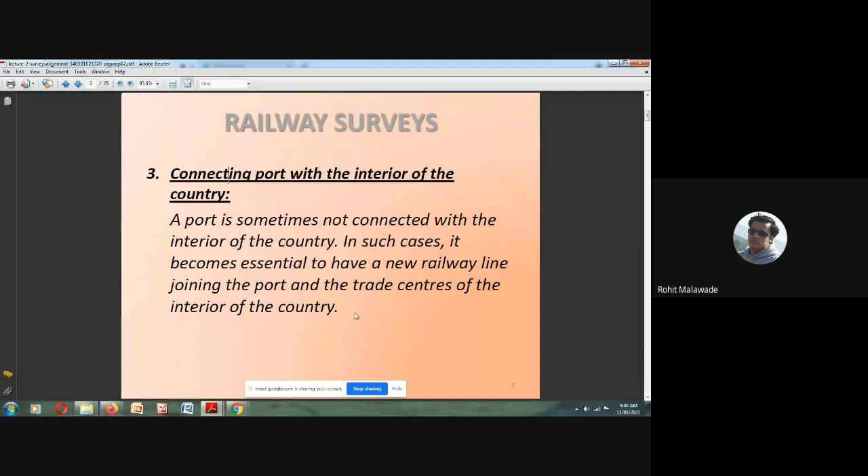Next is shortening of the existing route. Suppose you are having an existing route, and this distance is large. If I want to connect two points, point A and point B, instead of traveling along this existing road, I will be making a new route.

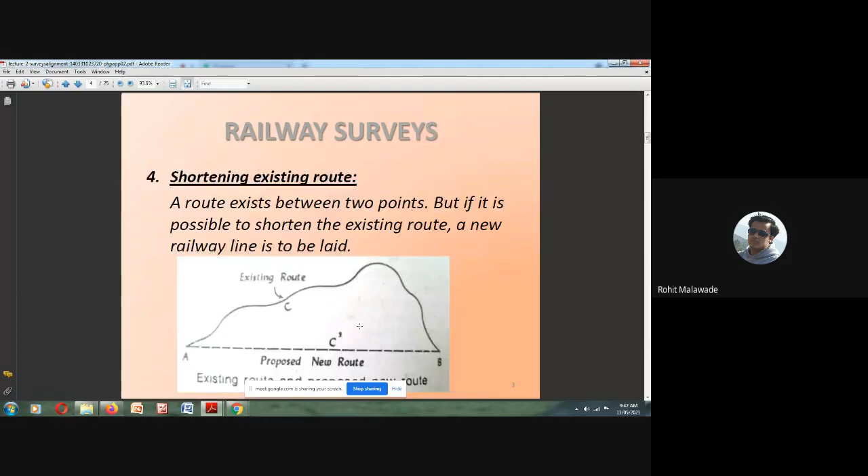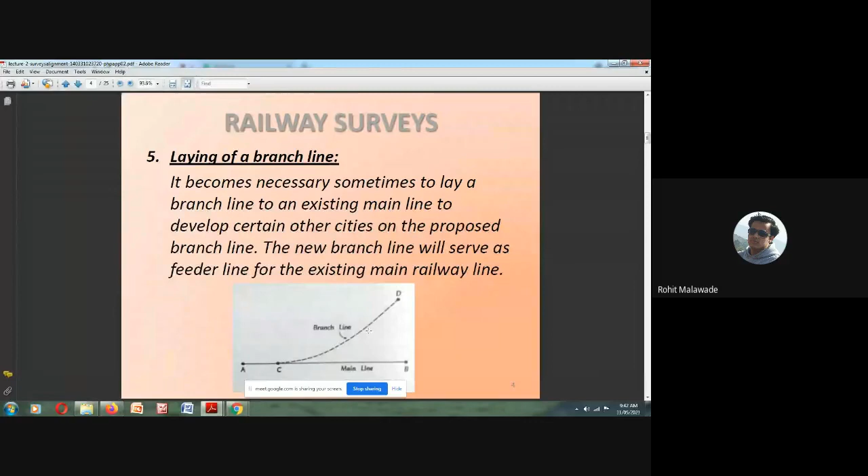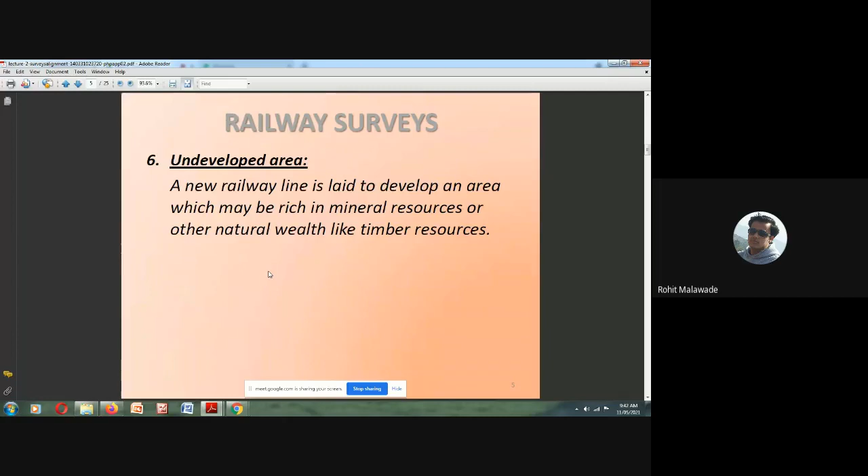So that is the reason why we will be having the surveys. Now, if an undeveloped area is there and we want to develop it, we will be carrying out route surveys. This is the reason why we have the route alignment survey. If you want to lay a new railway line, connect an undeveloped area, or connect from the port due to strategic importance, all these make us find out the new railway line.

Now, factors which are going to influence the proposed route. The first thing that comes before starting any project is cost.

Now, if I want to connect between the two points, and if the cost is getting more while the importance or purpose doesn't give us any financial or social benefit, then normally we are going to avoid such a project. If I want to connect two important places and there are too many hurdles, if the cost is much higher than whatever benefits we are going to get, then such a project we are going to drop. But if the benefits are much more than the cost, then we will adopt such a project.

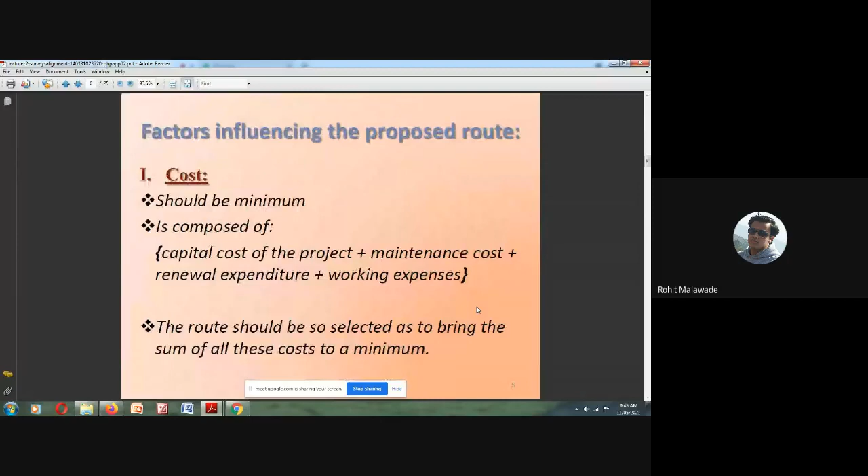Next is safety. The availability of safety for passengers and goods to be transported - it should be safe. Whatever route we choose, it should be safe for both passengers and goods. The route should be laid so as to have minimum chances of train accidents. Nowadays we find accidents happening here and there, so whatever route we choose should have minimum chances of train accidents.

Next comes the speed. First is cost, safety, and then speed. The route should be selected so as to have a reasonable speed of the train. The trains should have reasonable speed - it should not be too slow, it should not be too fast. The reasonable speed should be there.

Now we will see what kind of surveys we are going to have in order to conduct this route identification or route surveys.

So the first thing we are going to do is the reconnaissance survey. Then next is the preliminary survey and the location survey.

As a civil engineer, this reconnaissance survey is going to be very important to us. Now we will see what this reconnaissance survey is. As you know, you have done the extensive survey project also, so you know what reconnaissance survey is. It is the first survey that we are going to see.

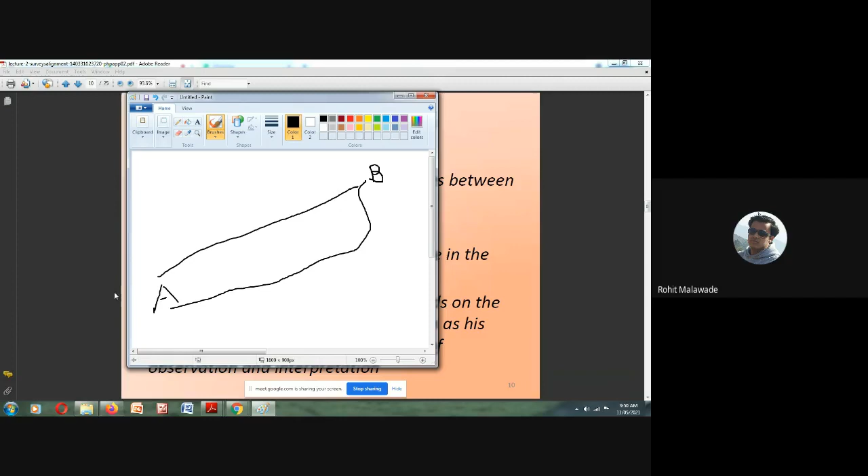Suppose in this particular way, one route we have chosen. This is your place A, and this is your place B. Now this is one alternative - reaching directly from A to B - or say, this is also one approach.

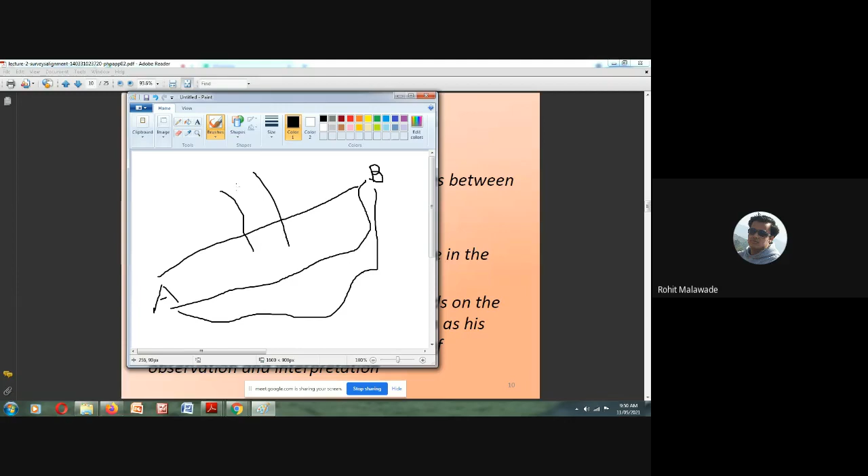In order to reach from one place to another, we will have certain alternatives. Suppose here, if I want to go from A to B and a river is crossing, then I need to construct a bridge over here. Now when we construct a bridge, the cost immediately increases.

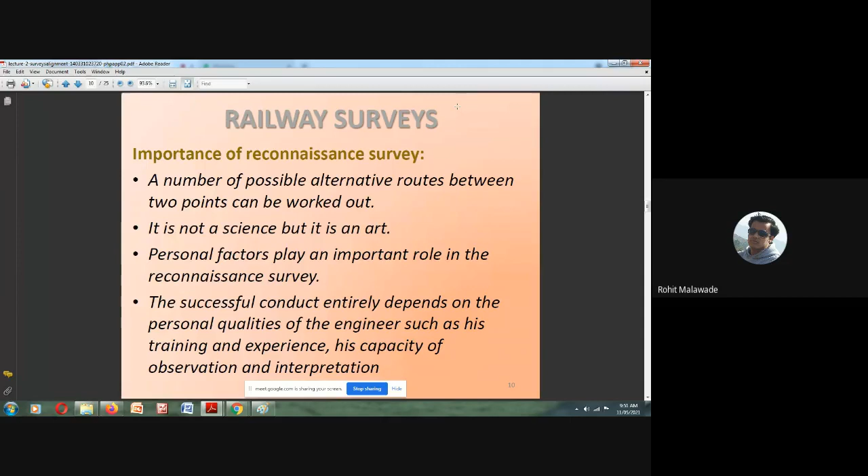Instead of this, I can choose this particular way, where the investment will be less and the distance is also small. So the meaning of alternatives is we should choose such an alternative that can be easily worked out cost-wise and environment-wise - it should not disturb the flora and fauna or the nature, and the cost should also be minimum. We should always find places where we can reduce the cost as well as minimize the environmental impact. This is what the reconnaissance survey is.

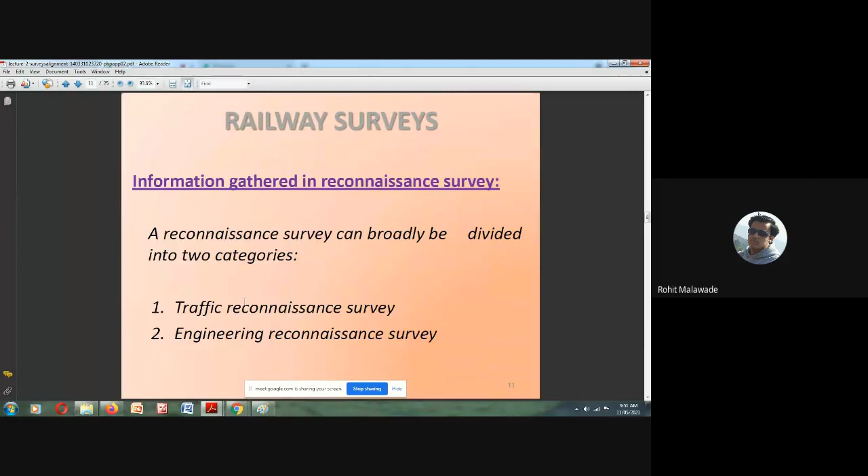Next is the information gathered in the reconnaissance survey. What we are going to gather is the traffic reconnaissance survey and engineering survey. The reconnaissance survey is again divided into traffic reconnaissance and engineering reconnaissance.

Now, what does the traffic reconnaissance consist of? It is going to consist of the general character of the country and the extent of cultivation. This is one factor - the general character of the country and the extent of cultivation.

Now, the country wherever we are going to have the particular project, in that particular place what kind of people are living, what is their daily livelihood dependent on, what kind of activity they do in their day to day life, and if they are moving from one place to another, by what source of transportation.

All the kind of data that you need to collect - information regarding the local industries and the religious festivals. We should also consider what different industries are situated there. It might be only farmers, or if there are industries, what kind of industry it is, how much is the population, and how their day to day mode of transport is - all these things we should consider.

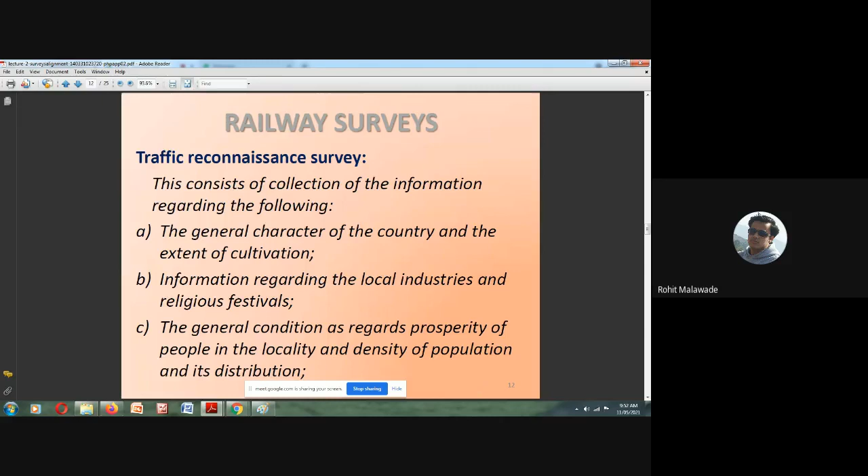Then we also consider the prosperity of the people in the locality and the density of the population and its distribution. We should consider how much is the population, what is their day-to-day activity, and how they will be moving. All these will be considered in the reconnaissance survey - that is traffic reconnaissance.

Probable amount of traffic to be served. We need to find out their source of movement - what source they are going to use in order to move from one place to another.

So here what becomes important is, suppose if I want to move from one place to another, if I'm going to construct a new railway line, how many people will get benefited out of that? That is going to be very important. If the people who are going to get benefited is too minimum, then the purpose of having the new railway line or new route is not going to be served. So this is how we need to take care regarding the possible movements of the people.

Then probable new traffic lines to be opened up to join the large centers of trade. In order to connect between two trading centers, suppose if we want to have a new railway line, in what way it can be provided - that we need to see.

Then next is nature and volume of the exports and their destination. Suppose if we want to have a new railway line, and the line is going to pass through the forest or the fields - how it is going to be affected, that survey also we should do.

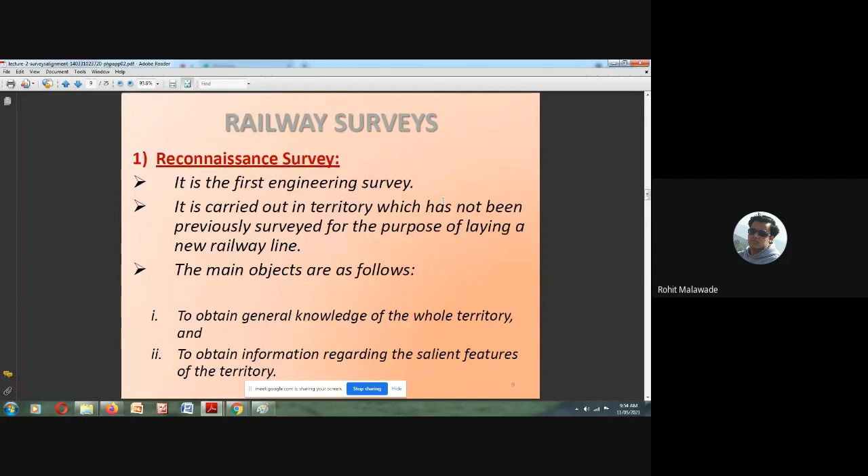Next comes visiting the trade center, consultation with prominent citizens - all these things we have already discussed. Study of the existing means of transportation, we have already discussed this - what is the existing mode of transport, and if we shift from this mode of transport, how many people will be getting benefited - that also we need to see.

Now, standard of construction required for carrying the probable traffic. How our permanent way should be designed to carry out, if many people will be using the particular railway line, how it is going to be maintained - that we need to see.

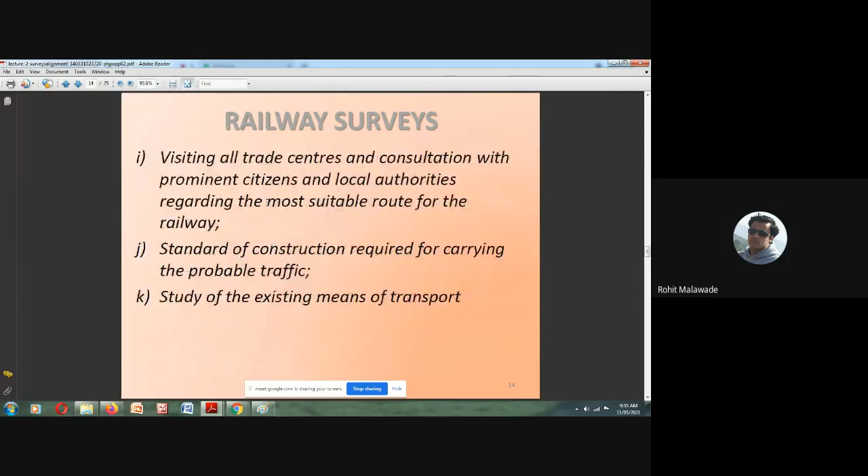Then the engineering surveys - this is the second part of the reconnaissance survey. Here the physical features of the country come in engineering reconnaissance. The first one we saw is traffic reconnaissance, now this is engineering reconnaissance. Physical features of the country - wherever we want to have a project, what is situated there, such as hill, valley, river.

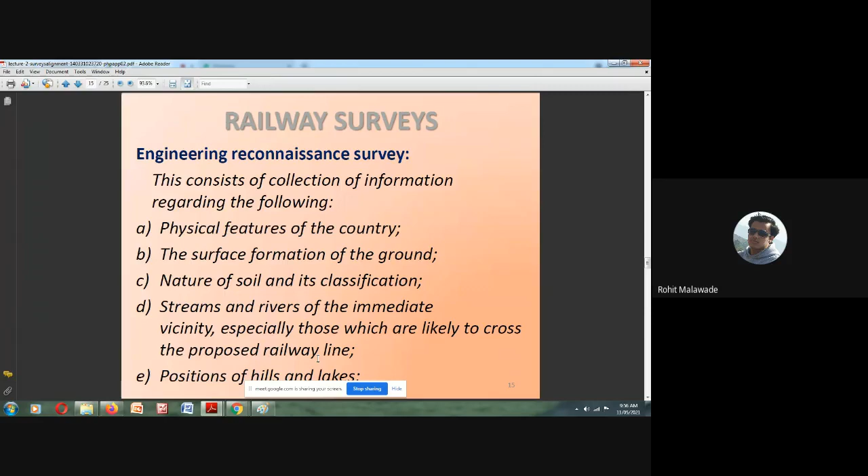All the physical features in the area where we want the project must be known: the surface formation of the ground, the soil characteristics and classification, and whether any rivers are crossing, especially those likely to cross the proposed railway line. We need to reconnaissance survey of that, and also the position of hills and lakes.

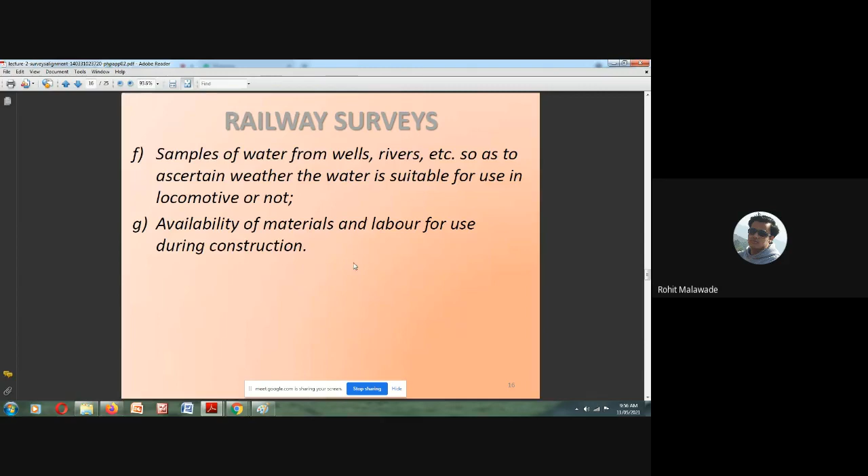Wherever we want to have the project, we should see the water condition also. Then the availability of materials and sources of labor during construction also need to be seen.

Now, factors to be kept in mind while doing the reconnaissance survey. First is the area. It should never be carried out for a line only; wherever we want the project, we should carry it out with the aspect of the entire country.

If I'm laying a railway line, it is dependent on the economy of the country. Whenever you want a railway line, it's not only going to benefit that particular place. How your country is going to be benefited by having that railway line is also something we should see. So the reconnaissance survey should not be restricted to that particular place; it should also see how laying that line benefits the country.

Now, existing roads: the survey should not be guided by existing roads, because ground favorable for construction of roads may not be useful for construction of the railway line. Normally, wherever existing roads are there, we want to have the railway line there too. But it should not happen that wherever roads are there, beside that only you should have the railway line.

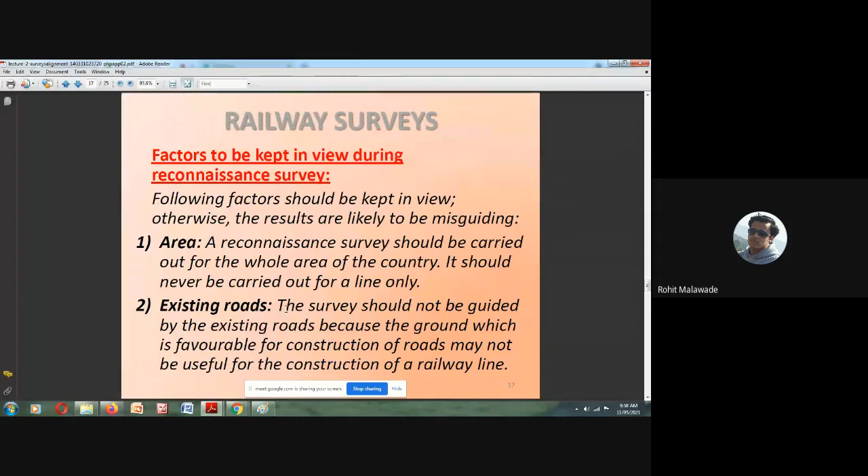You should also find out some alternatives for the fastest way to reach a particular place. Then, regarding the starting of the route, the engineer should not reject a particular route simply because it starts badly with a curvature or sudden rise and fall.

He must ascertain whether the route continues badly for a long distance. Suppose we are starting a line from one place to another, and at the starting point there is too much curvature or too much slope, we should not abandon that survey or that line. We should check that if the initial curvature or rise and fall is there, it should not continue for a longer distance.

If it continues for a longer distance, automatically the amount, or the cost, is going to increase.

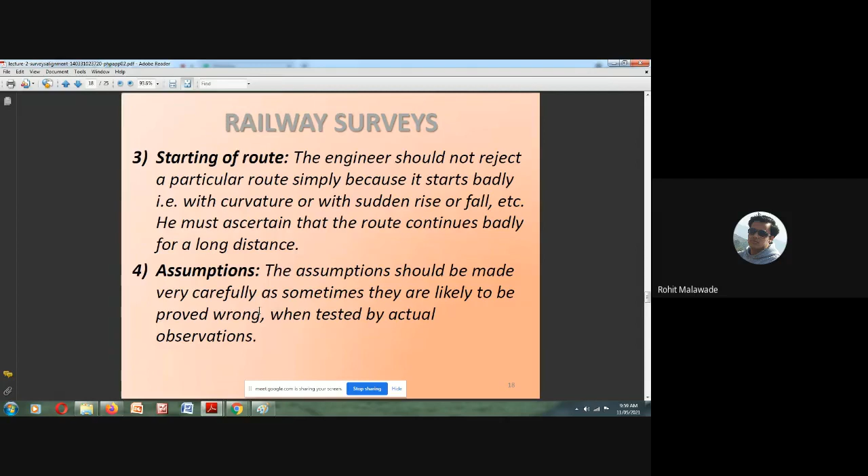Now there is a need for some assumptions, and whatever assumptions we make should be done very carefully, as they are likely to be proved wrong when tested by actual observations. Then the revenue from the proposed railway line must be worked out, as we have already discussed.

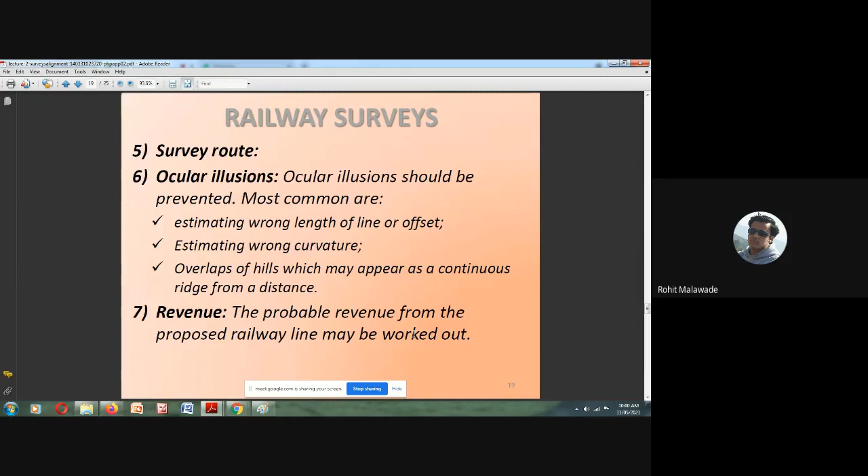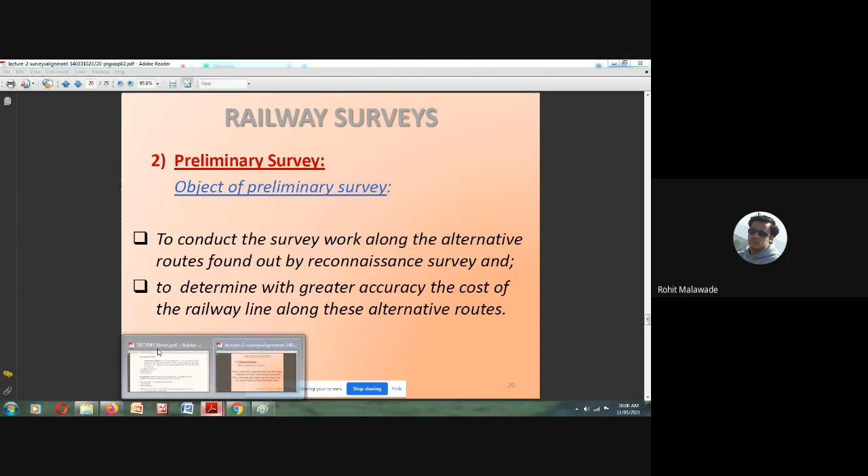Next, after the reconnaissance survey comes the preliminary survey. What is the preliminary survey? It is to conduct survey work along the alternative routes found out in the reconnaissance survey, and to determine with greater accuracy the line and the alternative routes. So the reconnaissance survey gives you the overall picture of the entire area.

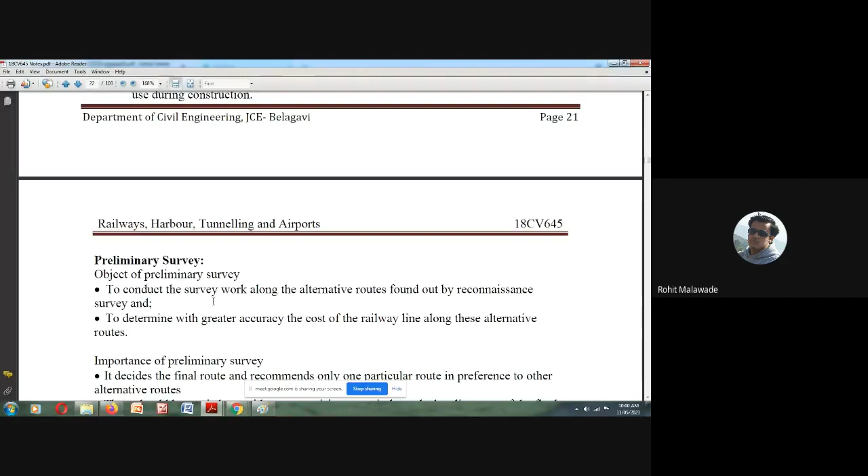Now what is a preliminary survey? It tells you which alternatives are available to you, so you can examine them, and it determines with greater accuracy the cost of the railway line along these alternatives. So here you are going to work out some of the things that the reconnaissance survey identified.

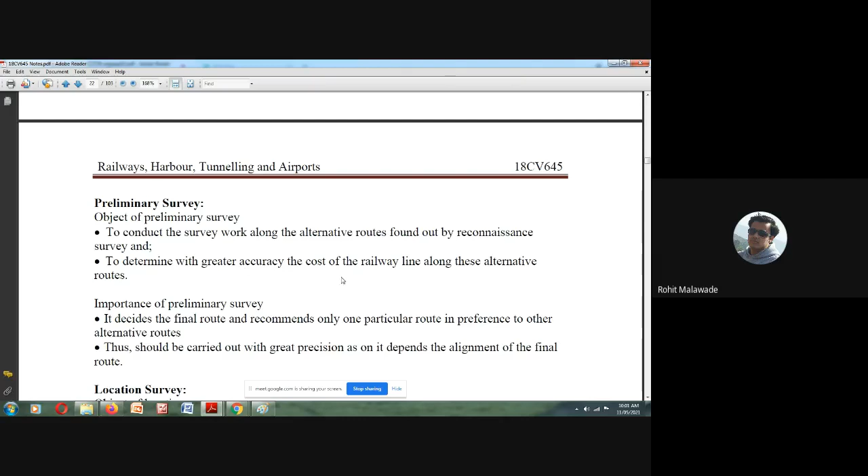Right, so if you are going to adopt the things of the reconnaissance survey, how it is going to be benefited, and the accuracy, you are going to check how much is the cost that is going to be required for that particular project. Okay, now it is going to decide the final route and recommends only one particular route out of the several alternatives.

Right now, in the reconnaissance survey, it is going to tell you which alternatives have to be chosen when there are several alternatives available. So by the cost, by the economy, and by the social benefits that you are going to get, you are going to finalize it in the preliminary survey. Then here you are going to choose the alignment of the final route.

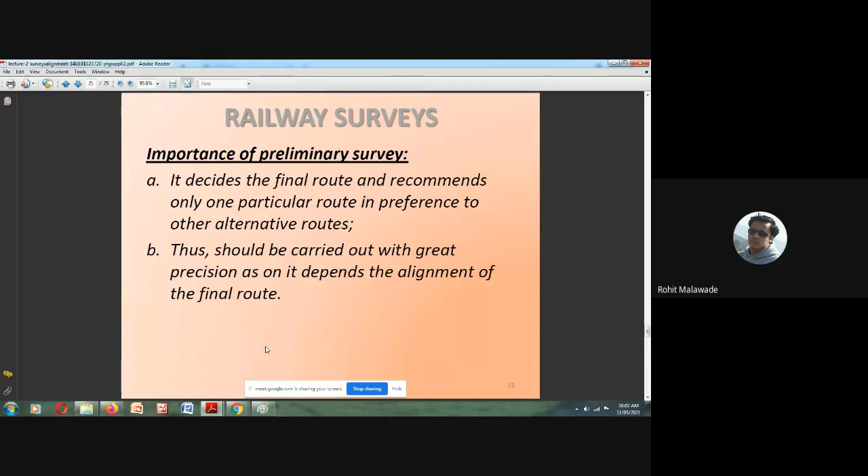Then next comes your location survey, to carry out the detailed survey along the route which has been found and fixed as the most economical route from the data of the preliminary survey. You are going to choose the route in the preliminary survey, and whatever route you have chosen in your preliminary survey, you are going to fix, and you are going to check the economy.

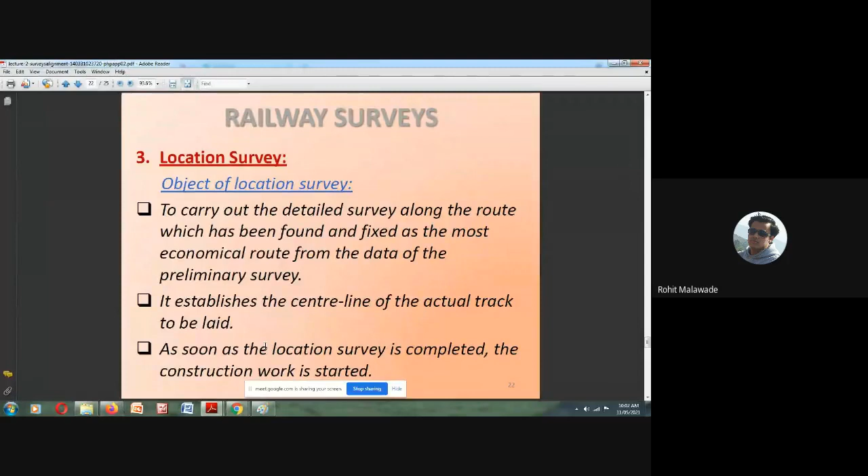It establishes the center line of the actual track to be laid. Now in the location survey, you are going to actually establish the actual railway line where you are going to have the survey. As soon as the location survey is completed, the construction work is going to be started. Location surveys are carried out by two means: one is paper location and one is field location.

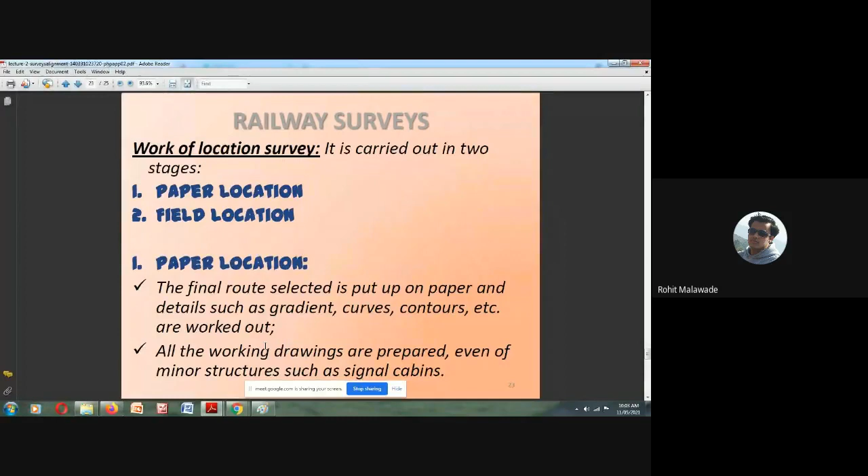First we will see what is paper location. The final route selected is put up on the paper, and the details of the gradients, curves and contours are worked out. All the working drawings are prepared, even of minor structures such as signal cabins. After the location survey is over, the field work is going to be started and the center line of the track is going to be fixed. So this is what your paper location survey is.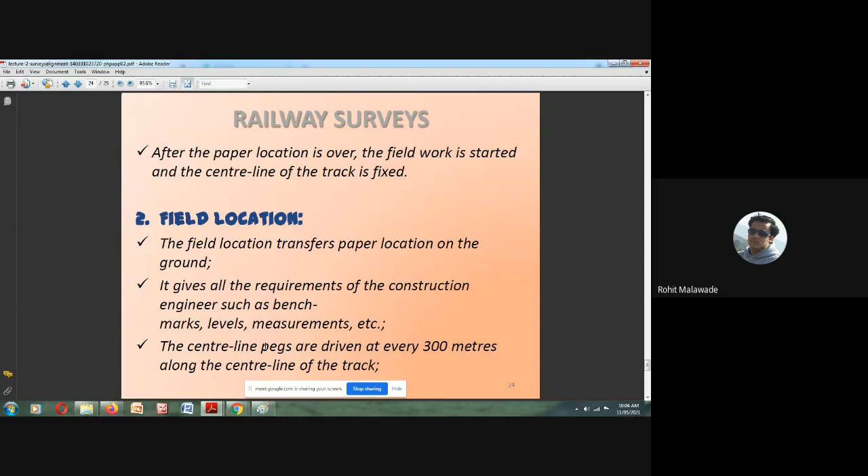Now field location transfers the paper location on the ground. Whatever locations we have marked on the paper, exactly it should be there on the field. It gives all requirements of the construction such as benchmarks, levels, measurements, etc. Center line pegs are driven at every 300 meters along the center line of the track. Whatever things are there on the field have to be entered on paper and vice versa. So this is what your location survey is going to tell about.

Then we will see the modern methods of designing the railway alignment. The reconnaissance survey and all these are the conventional methods for route alignment surveys. But now modern survey methods are also available in order to lay down the track. First is GIS, Geographic Information System, for the route alignment: the planning of the proposed railway alignment with the help of thematic maps.

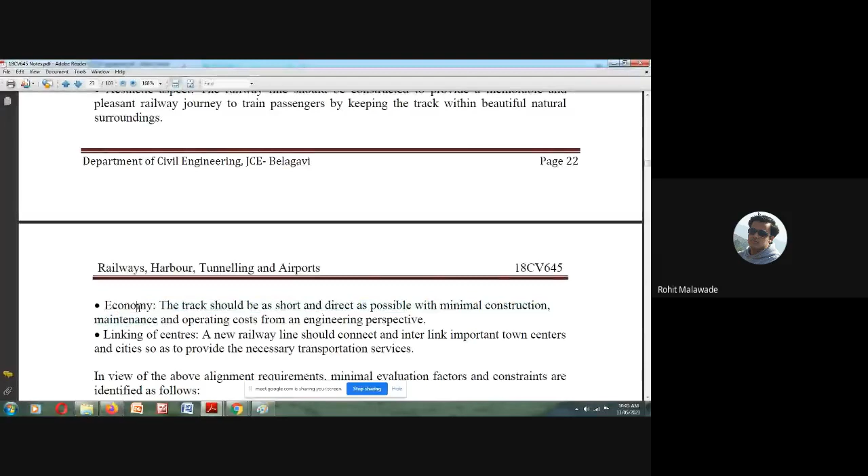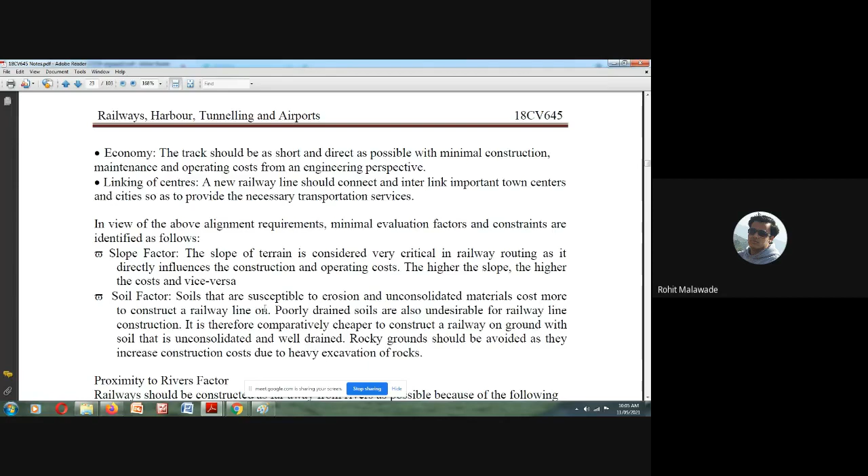First comes safety: the track should be aligned so as to ensure the goods and passengers are safe. And the economy, linking of the centers, which we have already seen. In case of the above alignment, the minimum evaluation of constraints needed: first is the slope factor, how much slope we are going to provide. Then the soil factor, the different soil conditions and characteristics of the soil and how it is going to be affected. Then the proximity to rivers. All these things we have already discussed.

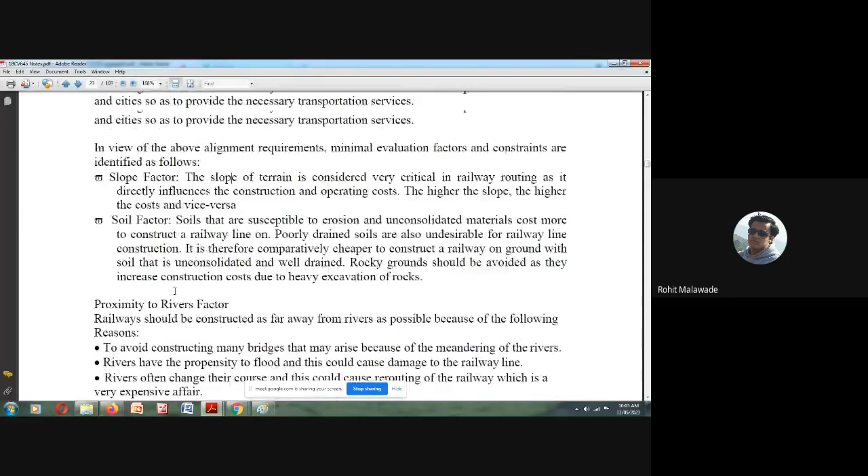Now here, what we are going to have from the geographic information system is, in the reconnaissance survey, what used to happen is we people had to move on the field, and we were seeing it. Now by having this geographic information system, we will be getting the pictures of that particular terrain where it is going to be situated, and by having that particular idea, on the field we will be looking for all those terrain characteristics.

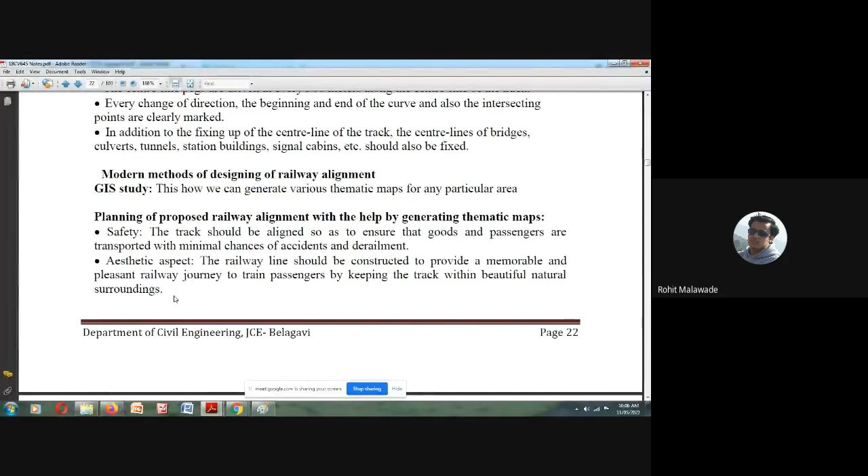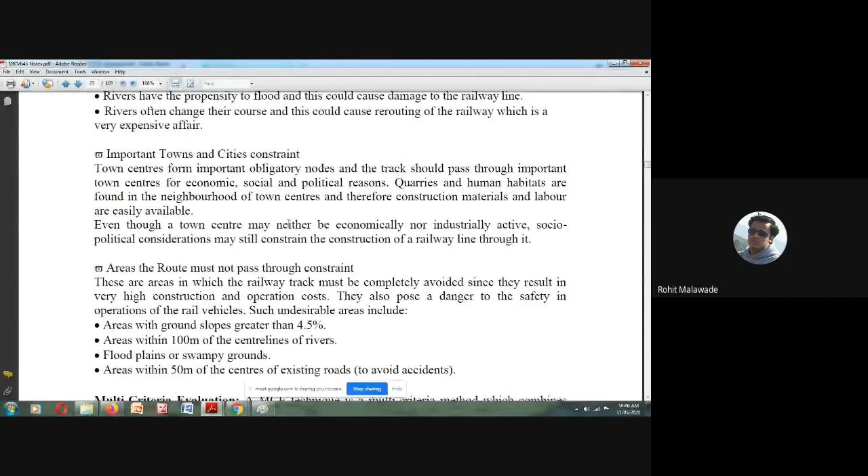So here, what we are going to do is, from the geographic information system we will be having the terrain study. Where it is going to be situated, we are going to collect the maps of that particular area, and then we will be seeing how it is going to be important.

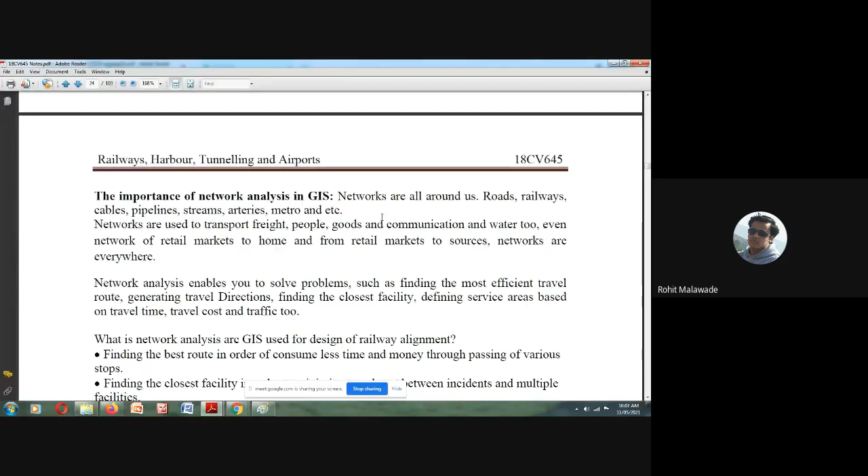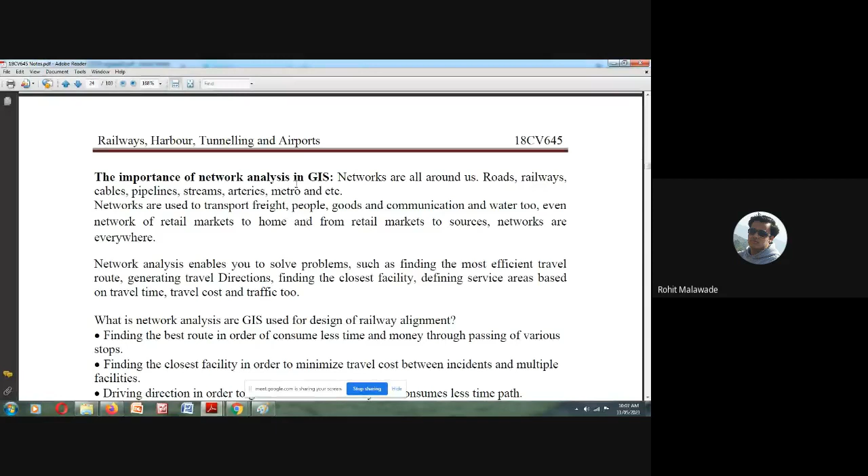Now, the importance of network analysis in GIS is the roads. GIS is not only going to provide you the terrain. It is also going to present you how the railway lines are there, how the road lines are there, what kind of arteries are there, if the river is traveling from what kind of an area, how many hills are there. So all these factors it is going to give you in case of your GIS.

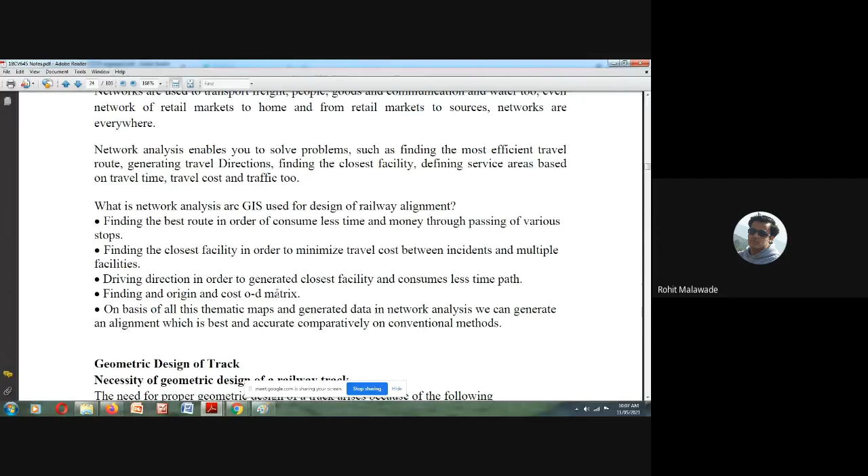Okay. Now, as your GIS, the geographic information system, it is going to tell you which is the best route that we need to choose when we want to have the project, which is going to be the best alternative in order to minimize the cost and all. It is going to tell you the origin and the cost that is going to be benefited. Now, next comes your geometric design.

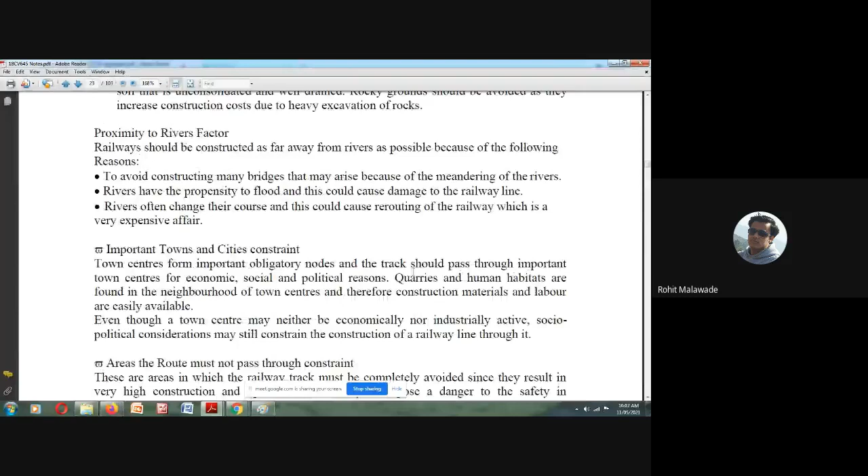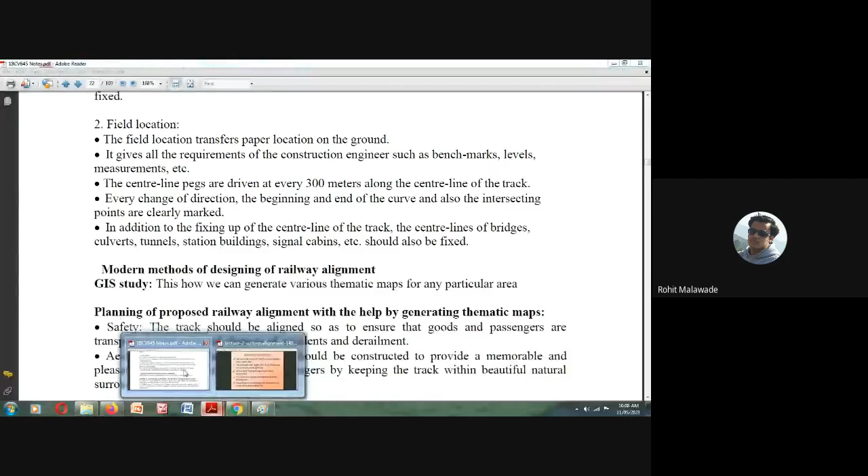So here in the modern technique, we will be using GIS in order to have the reconnaissance survey, and in order to get the actual features that are there on the ground. In order to do that, we will be doing the route alignment surveys with the help of your GIS system. So that is the modern technique that we are going to use in order to have the route alignment surveys.

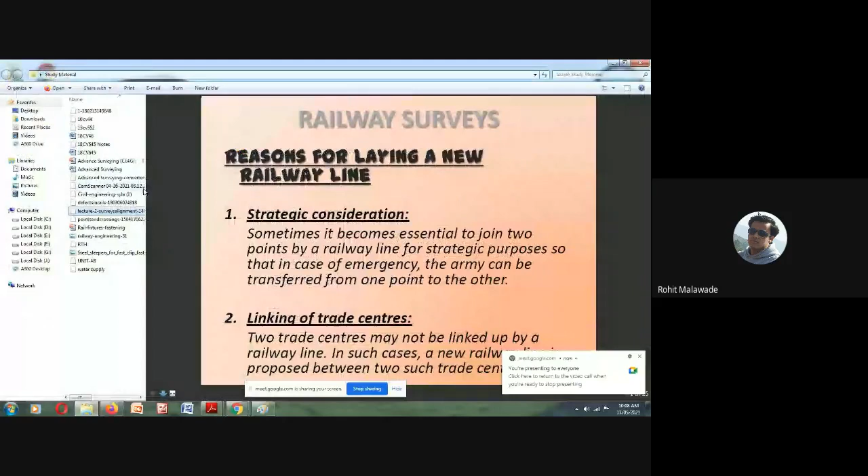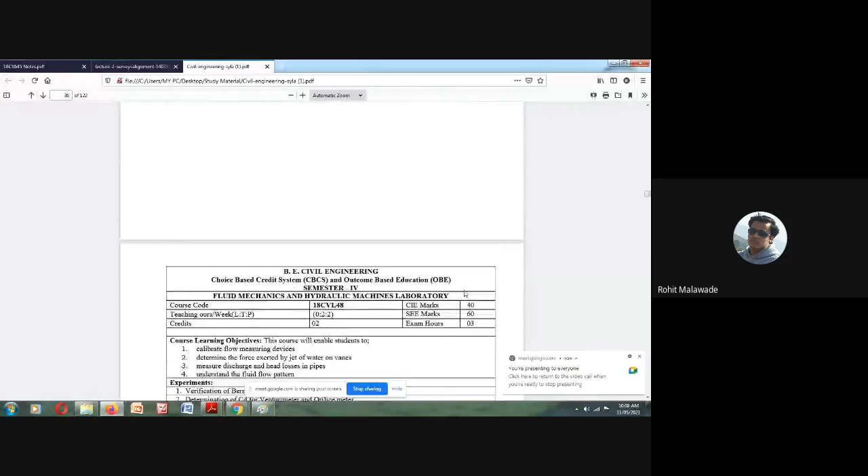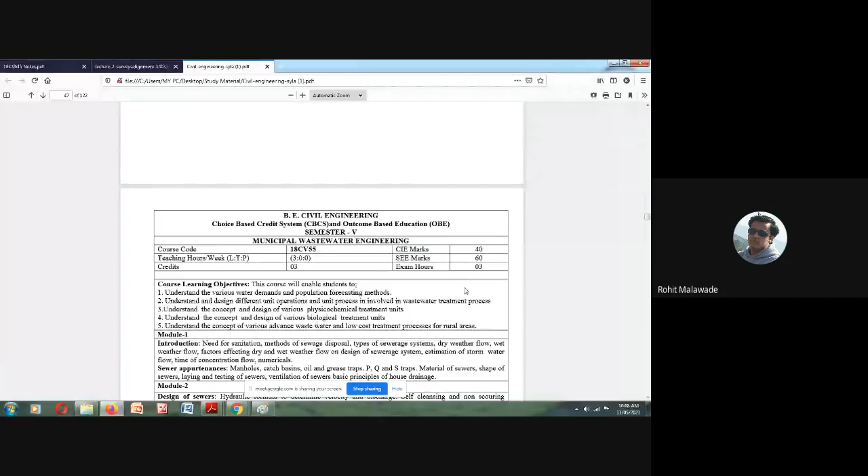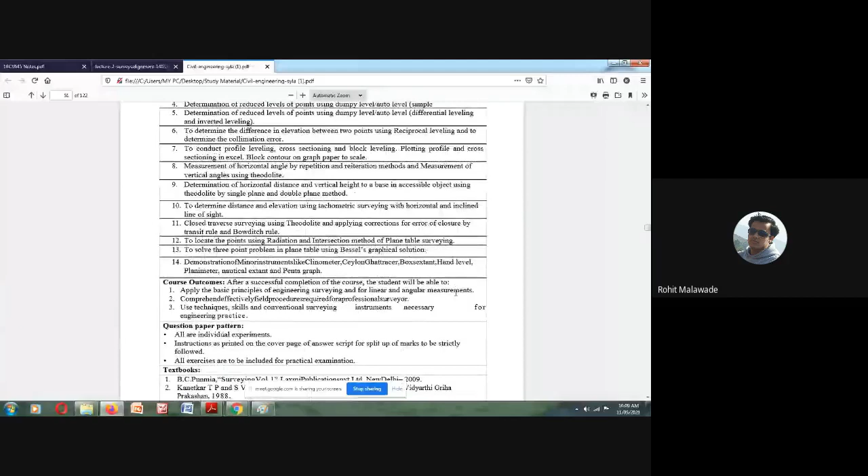So we will see the syllabus, how much we have covered, so that it is helpful for us what we have left with. Is there any doubt in route alignment surveys? See, we are going to have the reconnaissance survey, the preliminary survey, and the paper location. Do you have any doubt? No, sir. Veena? No, sir. Okay. We have left with the geometric design.

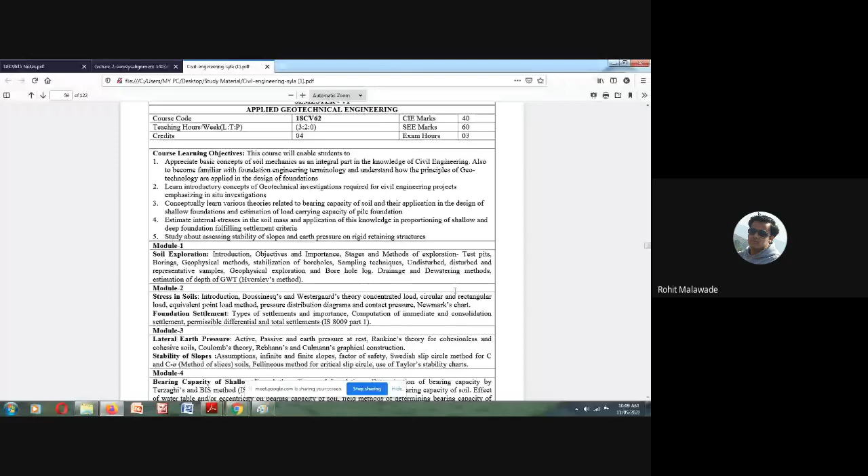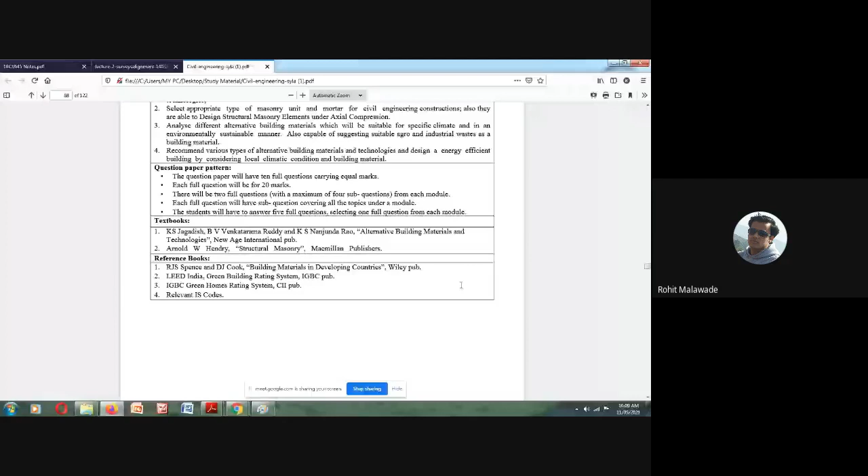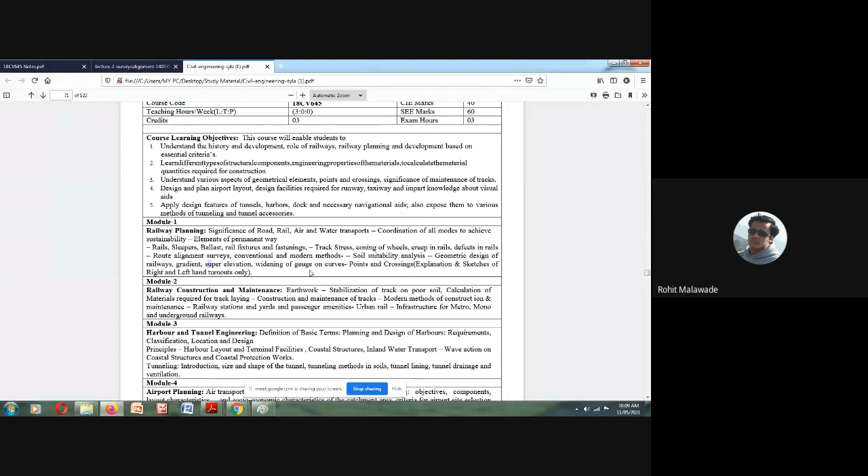So we have covered significance of rail, road, air, water transport coordination. Elements of permanent way we covered: rail, sleeper, ballast, rail fixtures and fastenings. Track stresses we need to cover, and coning of wheels is covered. Creep, defects, route alignment surveys, conventional and modern methods. Geometric design of the railway lines, that is gradient, super elevation, points and crossings, we have already covered. So hardly 2 to 3 topics are there that we will try to cover within this week. This was the biggest module in your entire RTH, so it has taken a lot of time.

Is there any doubt? If no doubts, then we are going to end the session. No, sir.

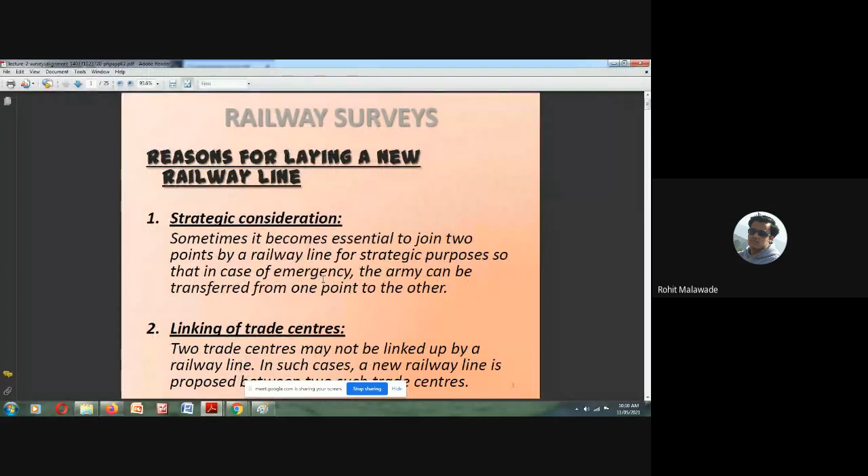So just we will have at a glance what we have studied. Your route alignment surveys include reconnaissance survey, preliminary survey, and location survey. Reconnaissance survey is going to tell you where exactly it is going to be situated. In the preliminary survey, you are going to finalize some of the routes. In location surveys, whatever paperwork you have done, you are going to see whether it is there on the ground, and with accuracy you need to check it. So this is what your surveys are going to tell in order to lay down the railway lines.